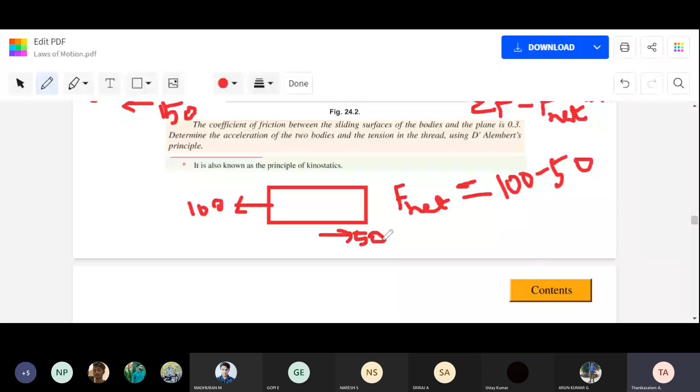But what are we calculating? F net. F net means irrespective of minus or plus, irrespective of directions, left side or right side, F net means maximum force minus minimum force. How do you know maximum and minimum? The direction the body is moving has the maximum force, the other forces are minimum.

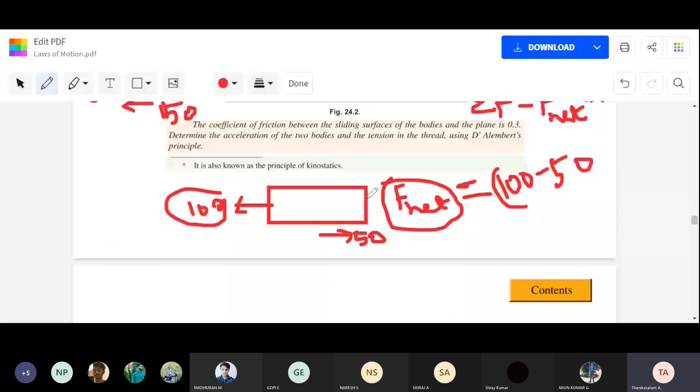So this block is now moving left side, applied force 100, friction force 50. Since the block moves left, that is the direction of motion, so maximum force is 100. I'm taking only positive values. Whenever you calculate F net, you have to consider maximum force minus minimum force without directions. Similarly, if the same block moves right side, maximum force is 100, minimum force is 50. Net force means maximum force minus minimum force.

So we are discussing Newton's second law of motion. We know Newton's second law, F net equal to ma. Then, next important topic, D'Alembert principle.

D'Alembert principle, other name dynamic equilibrium. You know what is equilibrium? The body is at rest under the action of forces, our body is stable. There are two types of equilibrium, already I told you: static equilibrium and dynamic equilibrium.

Static equilibrium, best example, the chair is always there, we are sitting on the chair, the chair is not moving. The TV is fixed on the wall, even though the weight is acting downward, it is fixed and supported, so the support balances it. That is static equilibrium.

What is dynamic equilibrium? Just imagine the fan is not switched on, it's not rotating. When we switch it on, the speed gradually increases, rotation increases. After reaching maximum speed, it rotates at constant rotation, constant speed. Now is it stable or not? Yes, stable, dynamically stable. Understand? Dynamically stable.

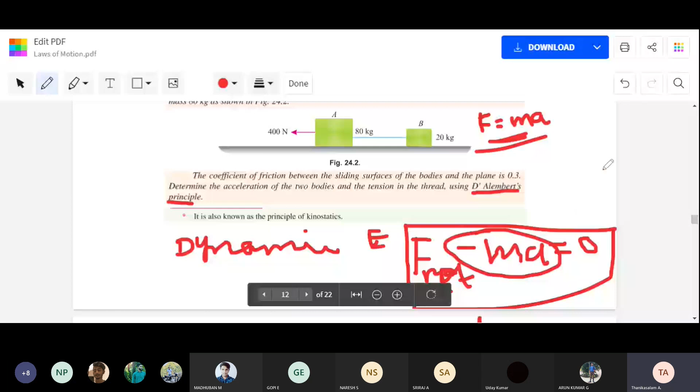Understand this minus m a? It means the reverse effective force. So understand what is dynamic equilibrium: F net minus m a. Now we are going to solve a problem using this.

I have explained what net force is, then explained Newton's second law and the D'Alembert principle. Keep this in mind, we are going to solve these problems.

Arun Kumar, can you read this problem now?

Two bodies A and B of mass 80 kg and 20 kg are connected by a thread and move along a long rough horizontal plane under the action of a force of 400 Newton applied to the first body of mass 80 kg, as shown in figure 24.2.

So we have two bodies, A and B. Just imagine two bodies A and B with mass 80 kg and 20 kg, connected by a thread, and moving along a rough horizontal plane. Whenever we say rough, it means there really is friction present. Rough surface means friction is available.

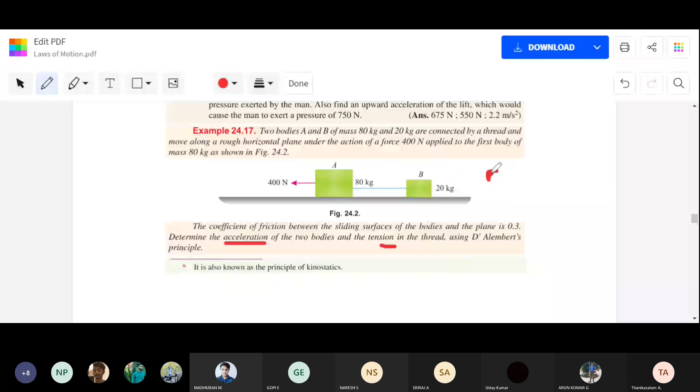See, like a railway engine at the front, connected in series with other compartments. If the engine moves at some speed, the other compartments also move at the same speed. Similarly here, the acceleration of block A equals the acceleration of block B, since A is constant, just like the rail engine.

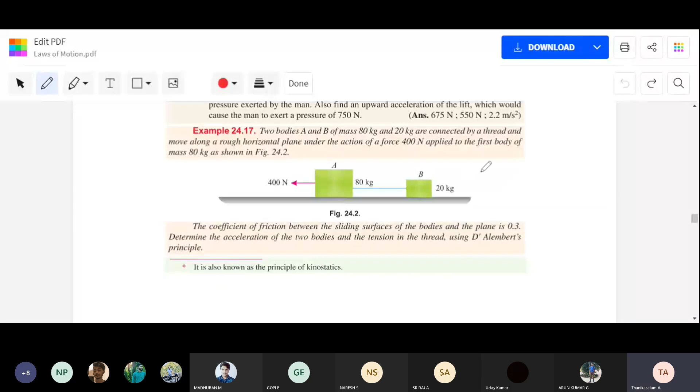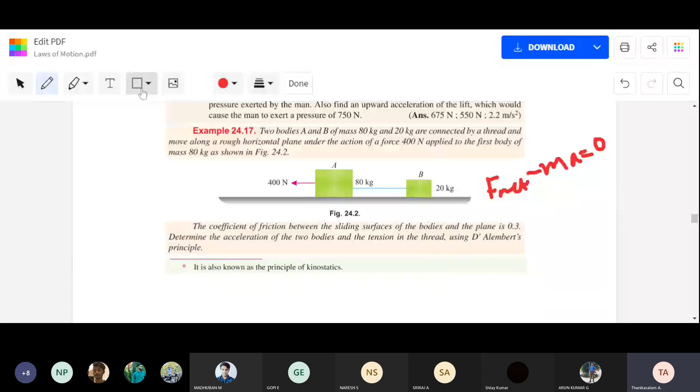So we are using the D'Alembert principle. What is it? Just imagine F net minus m a equal to 0. So I am taking block A.

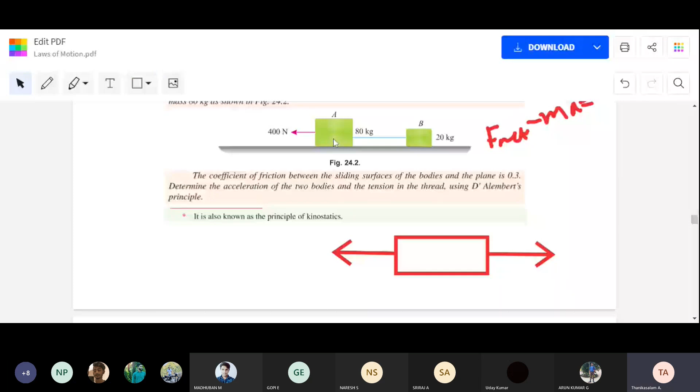So which direction does block A move? Left direction, with the 400 Newton force. Here the tension is connected in which direction? Since these two blocks are connected by tension, consider the tension acting in the right direction, since the block is moving left.

What about friction, students? Friction acts in the opposite direction. We know weight acts vertically downward, and the normal reaction acts upward.

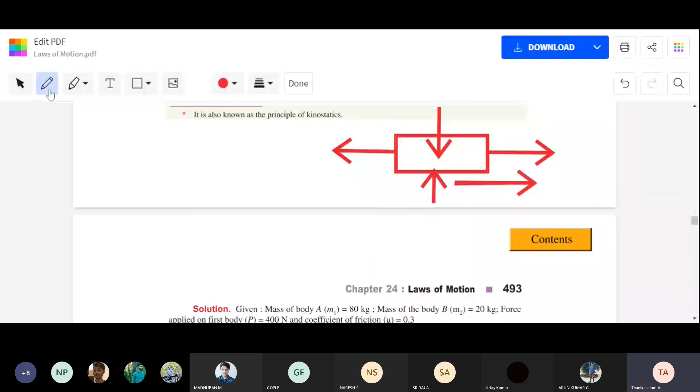Here weight equals what? We know mass into gravity. What is the mass? The first block is 80 kg, so weight equals 80 into 9.81.

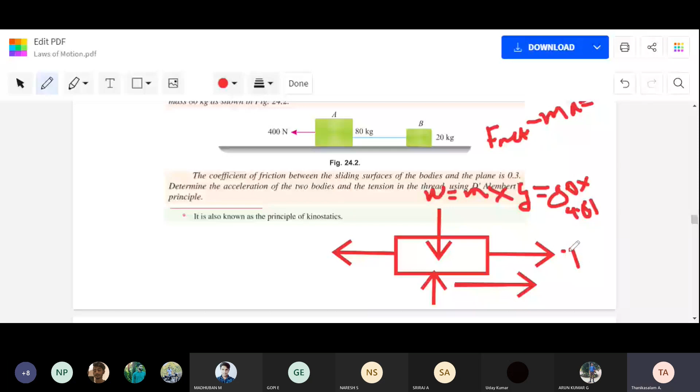Here we have tension T, force 400 Newton, normal reaction R, and friction F. Why is friction on the right side? Because the body is moving left side. So friction equals, as we already studied, F equal to mu into R. Can you remember? F equal to mu into R.

Now, we are applying which law? D'Alembert principle, F net minus MA. What is I told you?

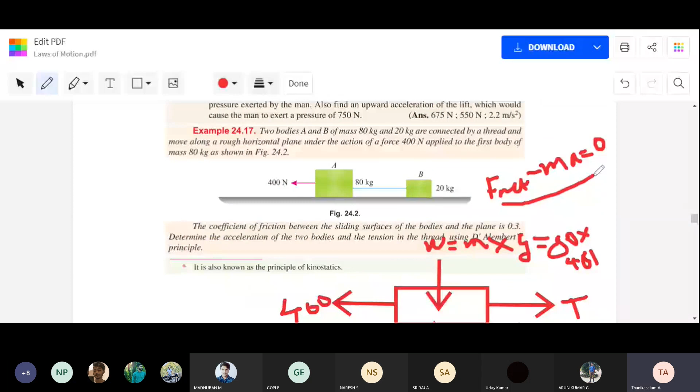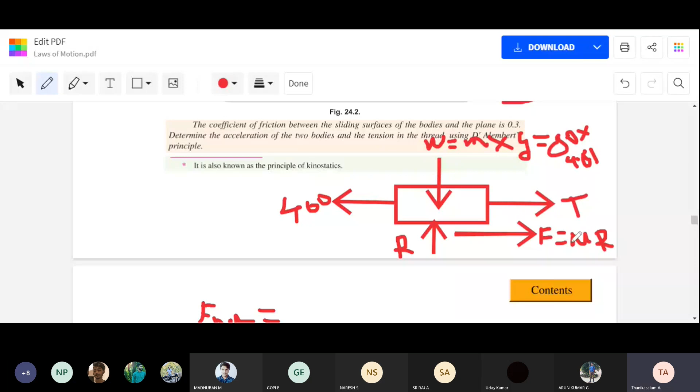What is F net? Anyone tell me from the diagram? What is F net value? Students, see the diagram. Maximum force minus minimum force, irrespective of direction. Which direction the body is moving, that direction is positive value, the other side negative value. Any one of you tell me what is F net value?

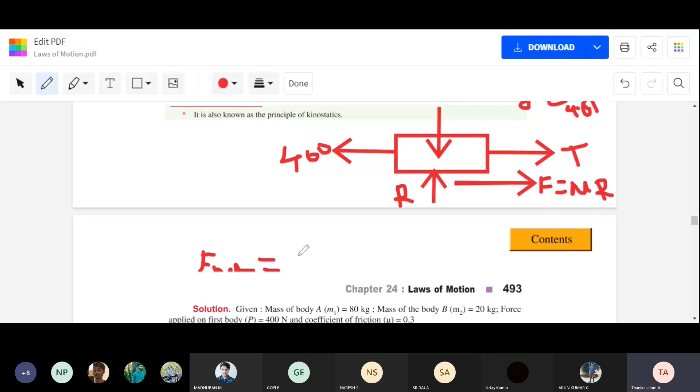Louis Paul? Louis, what is F net? Louis, Madhuban? Arun Kumar?

What is a net force? Net force means, I told you, maximum force minus minimum force, irrespective of direction.

So this block moving which direction? In the given question, 400 Newton is applied here, left side, so the block is moving left side. So which is the maximum? 400 is the maximum, students.

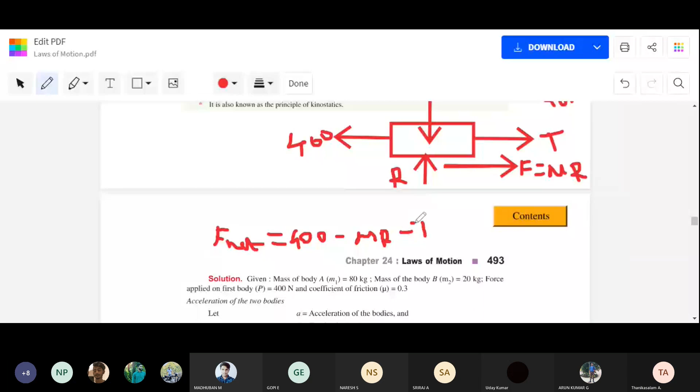400 minus mu R, minus T. Understand? This is F net. See here, F net value: F net equals 400 minus T minus F1.

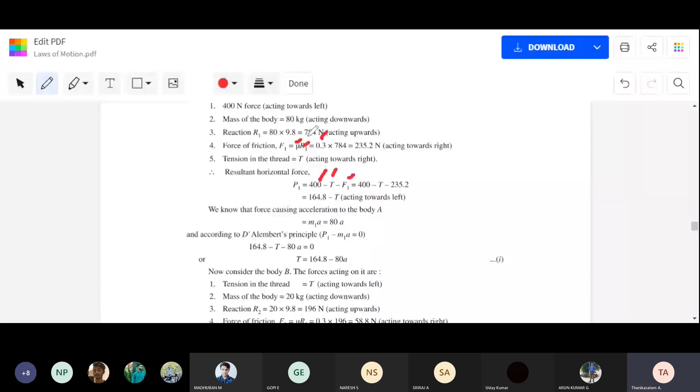Block 1, no? We know F1 equal to what? Mu1 into R1, students, mu1 into R1. What is the mu value? 0.3 given. What is R value? See the diagram, what is R equal to?

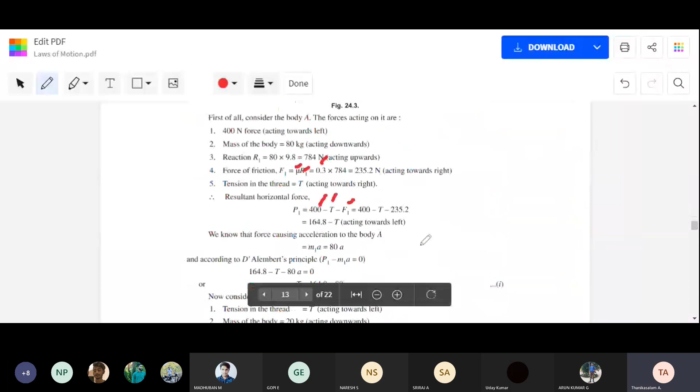W, no? The upward force, downward force, the vertical direction. What is the W? 80 into 9.81. Therefore, they calculated R equal to W1, no? R equal to, that is vertical force. We know summation Fy equal to 0.

Summation of Fy equal to 0, vertical direction, students, vertical direction. Therefore, R1 upward minus W equal to 0. Therefore, R equal to, what is the W value? Mass into gravity, so R is calculated.

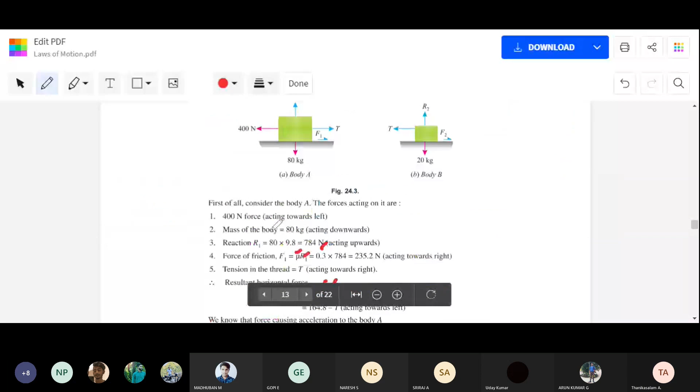So we know mu is 0.3. Therefore, see here, R equal to 80 into 9.81, which is 784. They applied here, after applying here, the final equation F net equal to this value. F net equal to, not P1, F net equal to 164.8 minus T. How they got this? Maximum force, other side minus force.

Minus T, minus F. What is F? Mu into R. What is R value? That is weight. So they got, we are applying what equation? D'Alembert principle. What is the D'Alembert principle? F net minus MA. See here, F net minus MA equal to 0. We calculated F net, this one, 164.8 minus T.

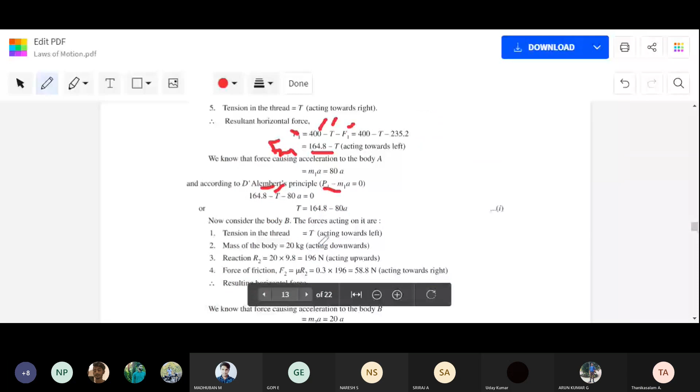Minus MA, no. What is M? 80 kg, 80 kg, and acceleration. So they found the first equation. Acceleration, we do not know acceleration. We want acceleration, so they formed the first equation.

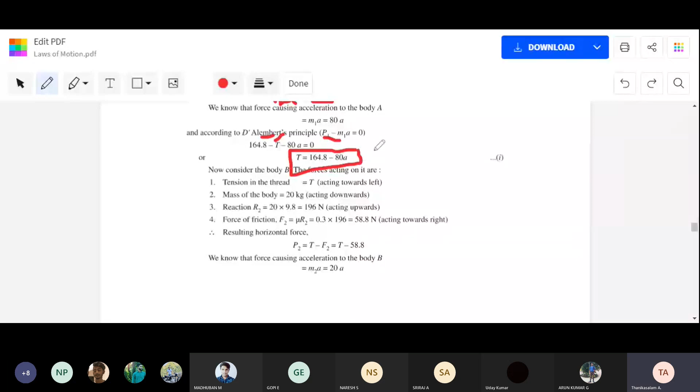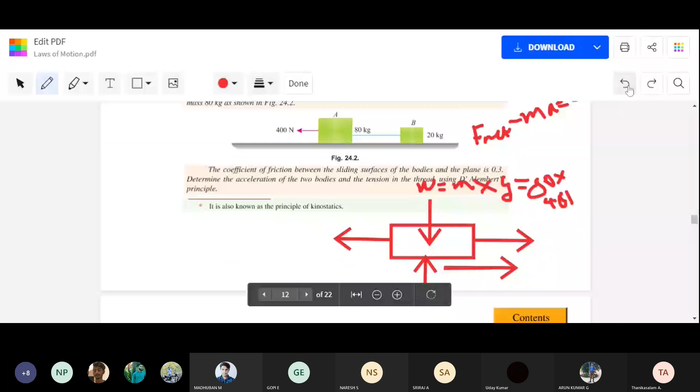Understand? That's the same method for applying to the second block. Apply the second block. Second block, just imagine, second block.

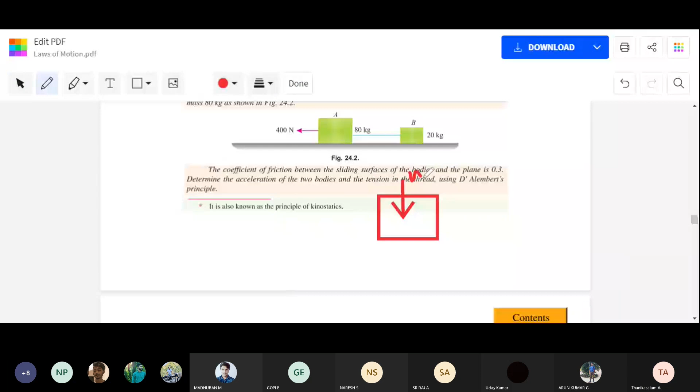The block is having how many weight? 20 kg, 20 kg acting downward. See, kg given, I told you whenever kg is given, you convert to weight. That is W equal to, students, 20 into 9.81. Why I multiply 9.81? 20 kg, therefore I multiply weight.

Okay, then every action equal to opposite reaction, R. So they connected with tension. How, which direction tension? This direction tension. So tension, no, here only connected, tension only.

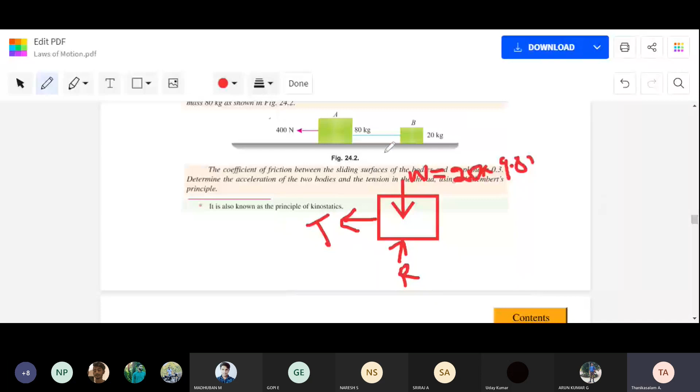Friction. The block is moving which direction? B is moving motion left side. Friction is right side. Students, F equal to mu into R.

We are applying D'Alembert principle. What is the D'Alembert principle? F net minus MA equal to 0. What is F net? I told you, no.

So the block is moving which direction? Left side, so left side may have force as maximum force. So T is the maximum. T minus, that is minus mu into R. That's only, that is F net. F net equal to T minus mu R.

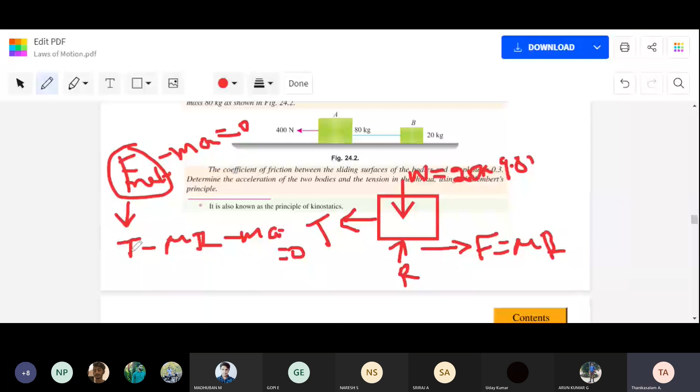Understand? Okay, minus MA, see, F net we calculate. Students, this is F net. F net minus MA equal to 0. See, in the single equation applied net force, and already D'Alembert principle, no, minus MA, so equal to 0.

Therefore, T minus, what is the mu value? Mu value given already 0.3, coefficient of friction 0.3. What is R? R equal to weight, no. So 20 into 9.81, students, 20 into 9.81, minus M. Minus, what is the M value? 20 kg, acceleration equal to 0.

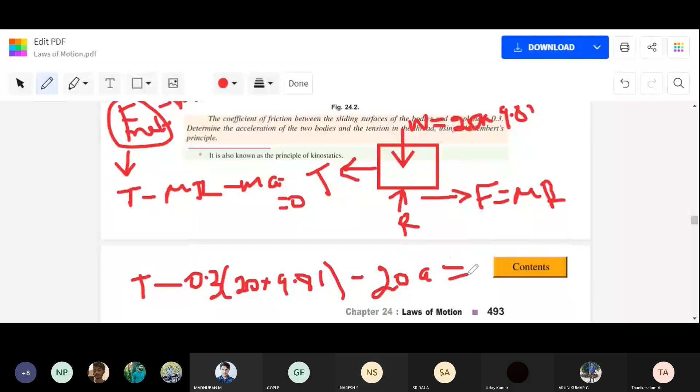Understand? We drew the free body diagram. See, in block A, B, only 20 kg. See here, 20 kg, so weight is acting downward, 20 into 9.81. So connect the thread, no, thread means tension, so tension left side. So friction opposite, because both blocks are moving left side.

Then every action equal to opposite reaction. We are using D'Alembert principle. Students, D'Alembert principle, what does D'Alembert principle say? That is F net minus MA equal to 0. I told you what is F net? Irrespective of direction, maximum force minus minimum force.

Which direction is the body moving? Here the body is moving to the left side. So the left side force is the maximum force. So maximum force minus minimum force, the friction force.

Okay, I calculated F, this is F net, understand? F net, this is the equation minus MA. So finally we find equation 2.

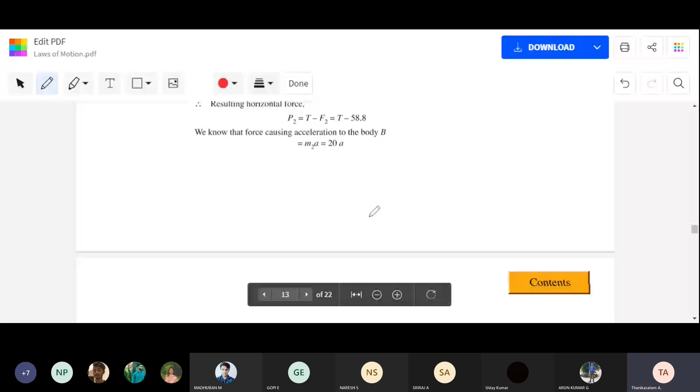See here, equation 2. So we have equation 1, equation 2. After simplifying, the acceleration, we got the acceleration equal to 1.06.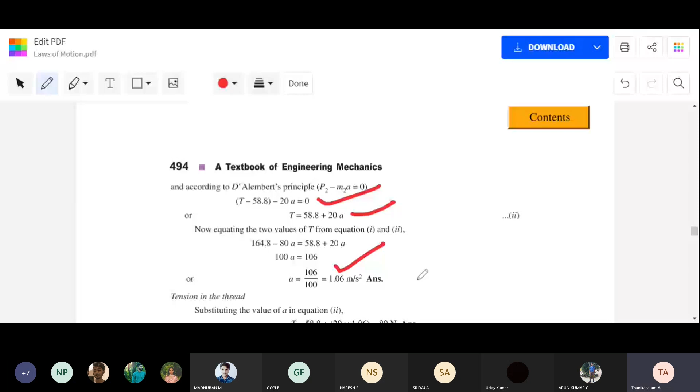When we apply the acceleration again in the equation, any one equation, here we got tension. Understand?

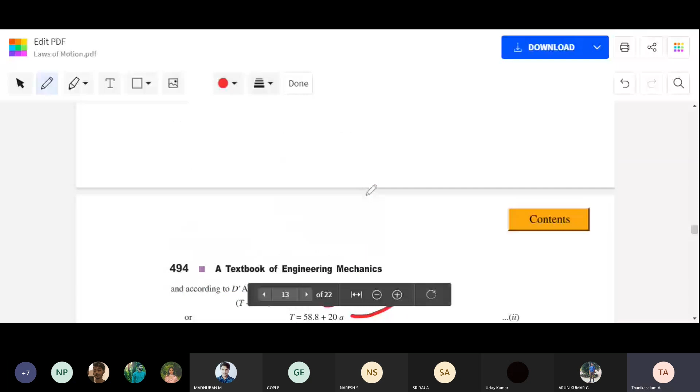Students, any question? Any question? Uday Kumar, class rep, any question? Arun Kumar, Louis, Naresh. No questions, sir. Nitin, Nitish, Sriraj.

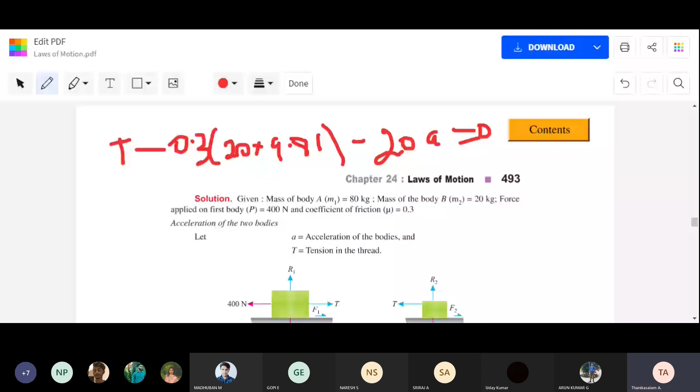Okay, so just remember, I am repeating this equation. We are using the new D'Alembert principle. What is the D'Alembert principle? F net minus MA equal to zero.

What is Newton's second law? F net equal to MA. Okay, what is F net? Irrespective of direction, maximum force minus minimum force.

Suppose the block is moving to the left side, the left side is taken as positive because that side has the maximum force, and the other, right side, is minus. Or suppose the block is moving right side, then right side is taken as positive, and the left side forces are the minimum force.

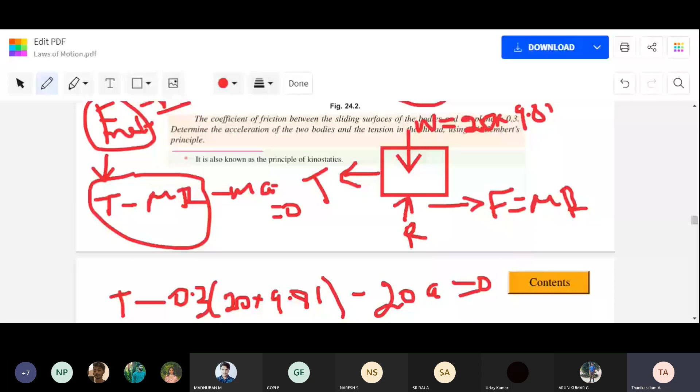Understand? We involve friction, no? Already we discussed this topic, discussed friction also. Here we are introducing the MA, additionally we introduce MA, students.

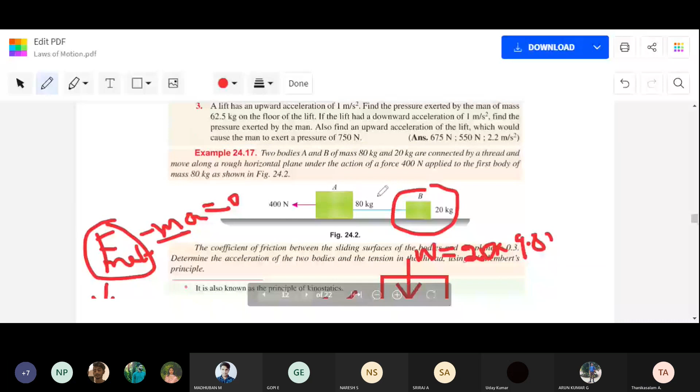MA, okay. So now I am sharing one YouTube lesson on Newton's second law. They use Newton's second law. Just imagine what is the difference between Newton's second law and D'Alembert. F net equal to MA is Newton's second law. F net minus MA equal to zero is D'Alembert's principle.

Okay, you can understand the problem. Any doubt you can ask me after the end of that video. Okay, now I am sharing it.

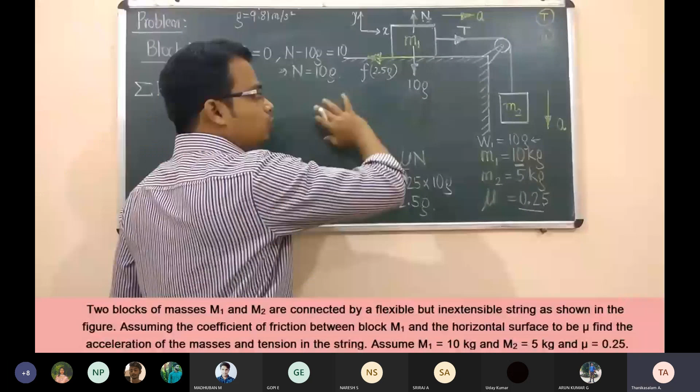Now guys, whenever you are solving problems with laws of motion, always try to work out the forces that are dominating the motion. So you can clearly see the motion is towards the right hand side, and the force towards the right hand side is this one, T.

That means this T is dominating, okay, with respect to this friction force. So what we can do is, T has to be taken as positive, and this friction force, whose magnitude is 2.5 G, is taken as negative, and that's all the forces that we've got.

That will be equal to the mass. How much is the mass? M1, where is M1? It's 10 kgs, times acceleration. That's T. Okay, let us say this is equation number 1.

Done and dusted, block 1 analysis is over. Now let's carry out the same analysis for block 2. Okay, so it's going to be something like this, very simple, if you write this quickly, block...

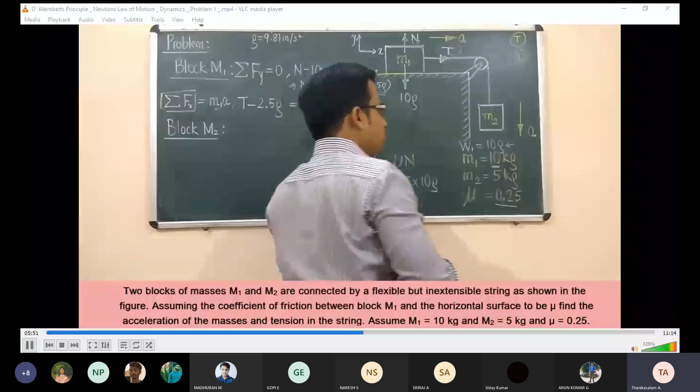M2. Okay, now you can clearly see that the motion is happening along the vertical axis. Now check which force is dominating, and for that I need to apply the force over here, so obviously this string, and there is going to be some weight. Figure out this right now.

Weight of this block, so weight is mg. Mg, how much is it? M is 5, so I can write 5g over here, where g represents the acceleration due to gravity. And due to this weight, there is going to be tension, which is going to have a magnitude of T.

Alright, between these two forces, can you tell me which force is dominating? Now, since the motion is happening in the downward direction, that means you can claim that this force, the 5g force, is dominating. Therefore this will be taken as positive, and the force opposite to this one, that is this tension T, will be taken as negative. That's the sign convention we're going to be following right now.

And here we go, summation of all the forces in the y direction is equal to mass into acceleration. So the block for which analysis is being done right now is block 2. It's going to be M2A, and the acceleration with which it is going downwards is represented by A, that's why we've written A over here.

Alright, so the force dominating is this one, 5G. Okay, right now we're taking the direction of the dominating force as positive. So this will be taken as positive, and this over here will be taken as negative. That's why this is 5G positive, T will be taken as negative.

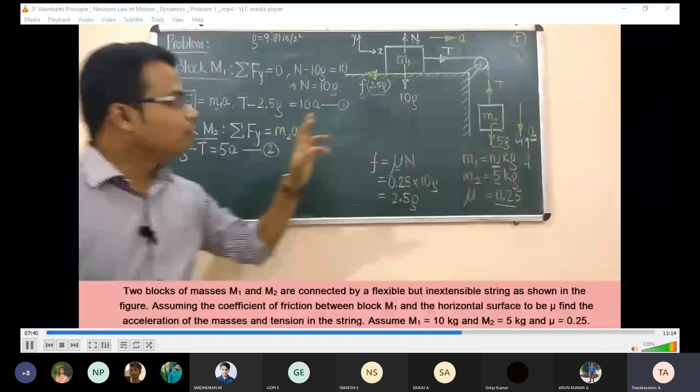So if we write this, 5G minus T is equal to mass into acceleration, block 2 mass, 5 kg, times acceleration, and that's it, that's equation number 2. Now you can clearly see that we have to calculate two outputs in the form of tension and acceleration. We have two equations. Okay, this T is unknown, and this also is unknown to us.

Acceleration T and A. We have two equations, two unknowns. G is already known to us. How much is it? 9.81.

The best thing to do right now, you can clearly see this T is positive and this T is negative, so I'll add these two equations, equation 1 plus equation 2. So T minus 2.5G, let me write this in totality, T minus 2.5G, plus 5G minus T is equivalent to 10A plus 5A. So guys, you can clearly see these two things will cancel out. 5G minus 2.5G is 2.5G only, which is going to be equal to 10 plus 5 is 15, 15A.

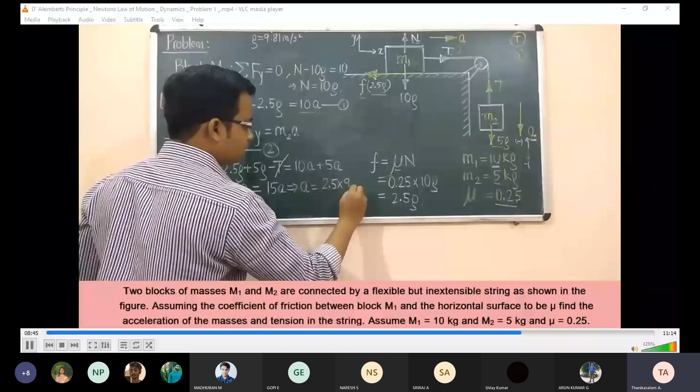So acceleration will work out as 2.5G over 15, and the value of G is 9.81 over 15. So the value of acceleration works out as, let me have this.

I'm sure you guys must have noted that friction thing. I need some space over here. So the value of acceleration is going to work out as, let me check how much it is. You can do this calculation in a calculator. And this eventually works out as 1.635 meters per second square. So that's the value of acceleration obtained.

Now you can put this value of acceleration in either equation 2 or equation 1 to get the value of tension T. It's going to be very simple. Now let's frame this equation in a better way. So I can write this as 5g minus t. Let's take t over to the right hand side and 5a will come over here. So t is equal to 5g minus 5a. So you just need to put the value of g and eventually you're going to get the value of tension T, which will give you 5 times 9.81 minus 5 times acceleration 1.635.

1.635. So you just do this calculation and the value of T shall work out as 40.875 newtons. So that's it, that's the tension T in the string, and that's the acceleration with which this entire system is going to move.

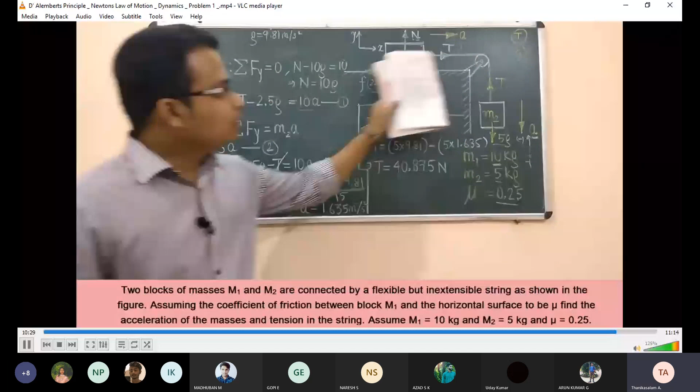Block M2 will go down with an acceleration of 1.635 and block M1 will move right inside with the same acceleration.

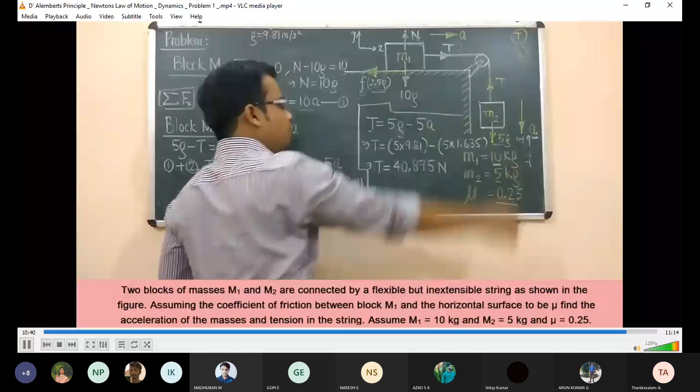Students, in this problem, two blocks of masses M1 and M2 are connected by a flexible but inextensible string as shown in the figure. Assuming the coefficient of friction between block M1 and the horizontal surface to be mu, find the acceleration of the masses and the tension in the string. Assume M1 mass 10 kilogram and M2 5 kilogram, mu equal to 0.25.

Understand? One block is resting on the horizontal surface, another block is hanging through a roller. M2 is 5 kg, M1 is 10 kg. So automatically, this is vertical hanging - even though small mass, it can pull down, no? So both blocks have the same acceleration, under the single inextensible rope. So tension is also the same.

Here he is applying Newton's second law. What is Newton's second law? F net equal to MA. See here, MA is here. What is F net? See the horizontal block, the first block. So tension acts right side, friction acts left side. Weight is acting vertically downward, normal reaction upward. Therefore, what is the weight? 10 into 9.81. That's why he put 10 into G, vertical downward.